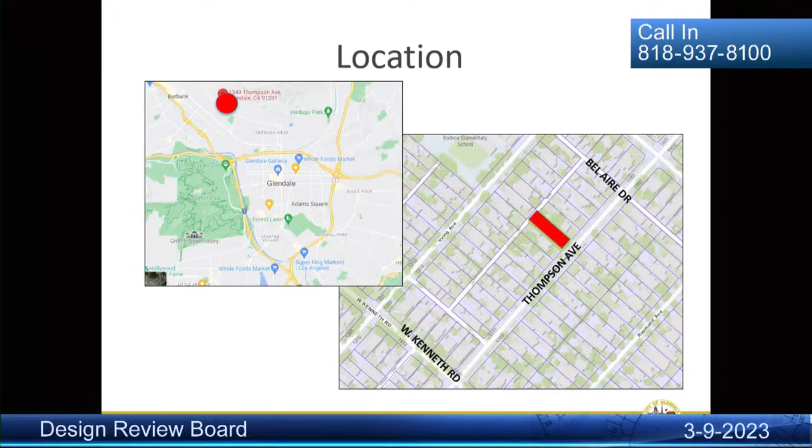The subject site is located in West Glendale on the west side of Thompson Avenue between West Kenneth Road and Bel Aire Drive. The property features a 7,849 square foot, relatively flat interior lot with alley access at the rear. The project will be required to offer a 125 square foot dedication at the alley, which brings the net lot size down to 7,724 square feet for purposes of development standards calculations.

The site is located in the R1-1 zone, which is the low-density residential zone with floor area ratio District 1. The zoning requires a 25-foot front setback, a maximum total floor area of 2,317 square feet for the site, and a 25-foot building height. The existing home is a 1,434 square foot one-story building with a detached garage constructed in 1923 with later modifications. The property does not appear to be eligible for historic designation and is not considered a historic resource under the California Environmental Quality Act.

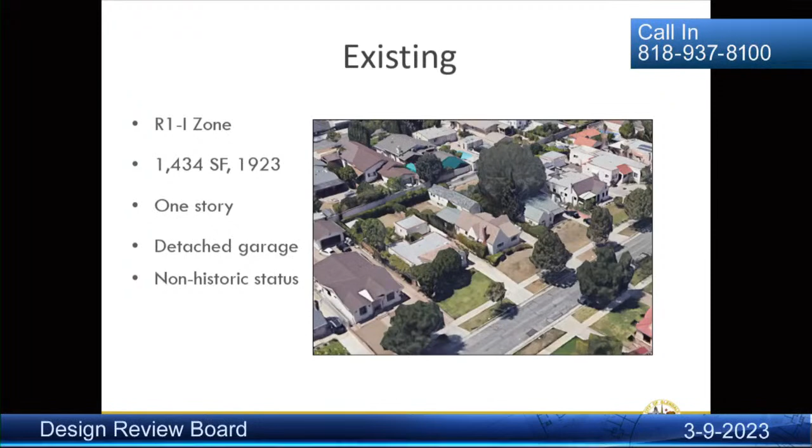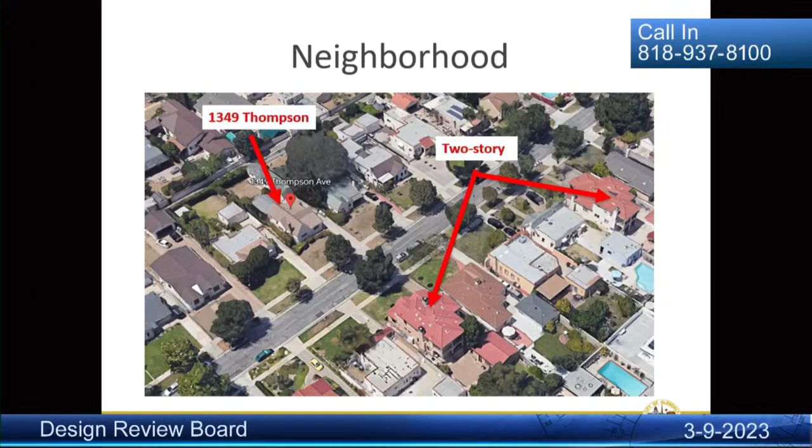The neighborhood consists primarily of smaller one-story houses, although there are two-story houses on the block, one directly across the street, and one 4 houses down in the direction of Bel Aire Drive.

This slide shows the other two-story houses on the street, which both feature second stories significantly stepped back from the front facade.

Worthy of note is that although the zoning requires a 25-foot front setback, the block seems to have actually a 35-foot prevailing front setback.

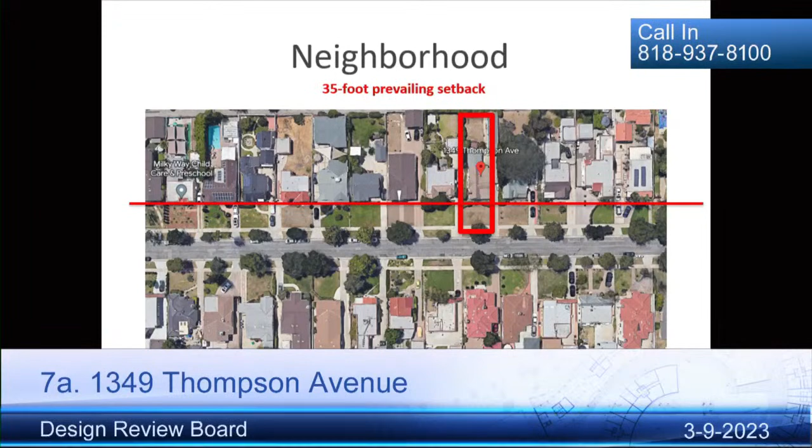The proposal under consideration is to demolish the existing house and replace it with a prairie-style two-story house featuring 2,305 square feet of floor area and a detached garage accessed through the alley. A new single-family home is also exempt from the California Environmental Quality Act review.

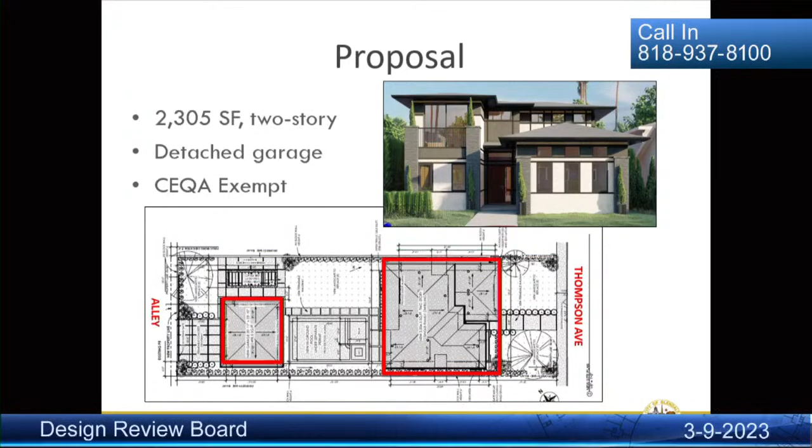In terms of site planning, the proposal includes the primary building at the street front, a pool behind it, a detached garage with access from the alley, and then a detached trellis to the right of that. The proposed building footprint does comply with the minimum setback standards.

However, at the right side of the front of the building, it does extend beyond the prevailing setback. A condition of approval is recommended to address this, perhaps by relocating the front facade or pushing back the house and reorienting the pool to accommodate a revised building footprint.

The current site plan is also changing from being separated from the property to the north, to the right, by a driveway, which was there before, and instead the building is now being extended the full width of the property. Although that's not the pattern on the street, a detached garage at the rear is consistent with the street pattern.

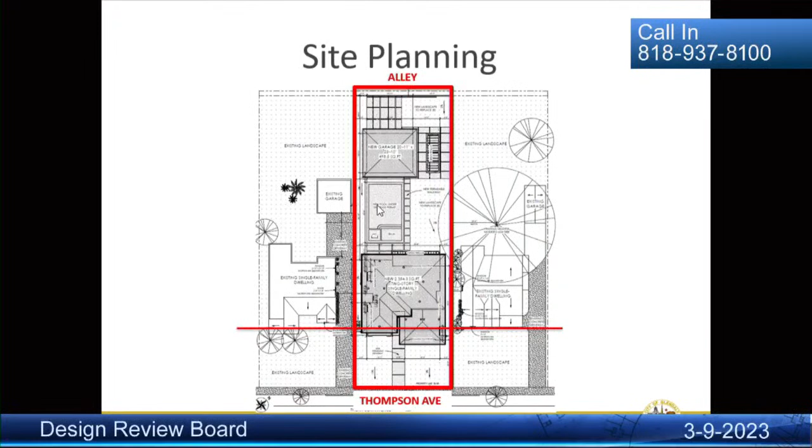The landscaping plan consists of large areas of lawn and shrubs around the perimeter and could use a wider variety of plant type and placement on the site. A condition of approval, therefore, is recommended to address this.

A 6-foot block wall is also proposed around the property, and it is appropriately stepped back from the front facade.

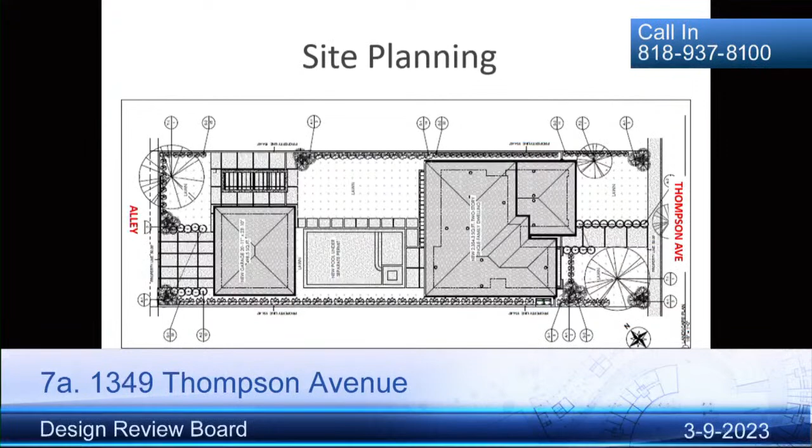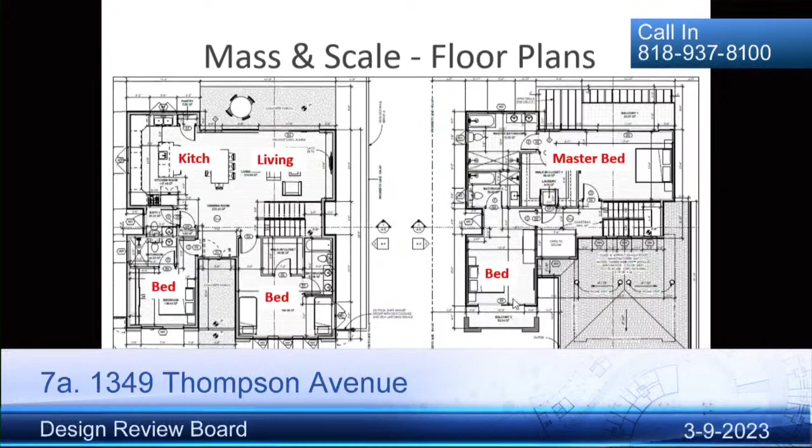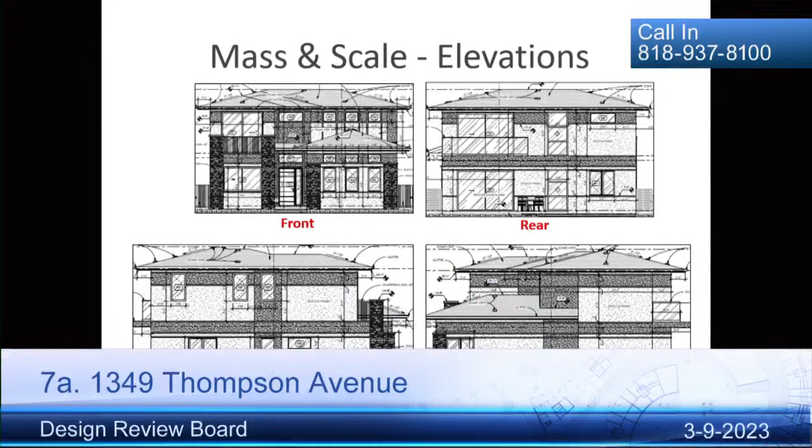Here in the elevations, you can see the lack of stepping on the second story and the resulting boxy massiness of the building. The FAR and height are also being maximized with this project, and while those aren't issues in themselves, the design doesn't temper them, so the building still comes across as tall and massive.

A condition of approval is recommended to push back portions of the second floor at the front and sides of the west side of the building to relieve the sense of mass and enhance compatibility with nearby properties.

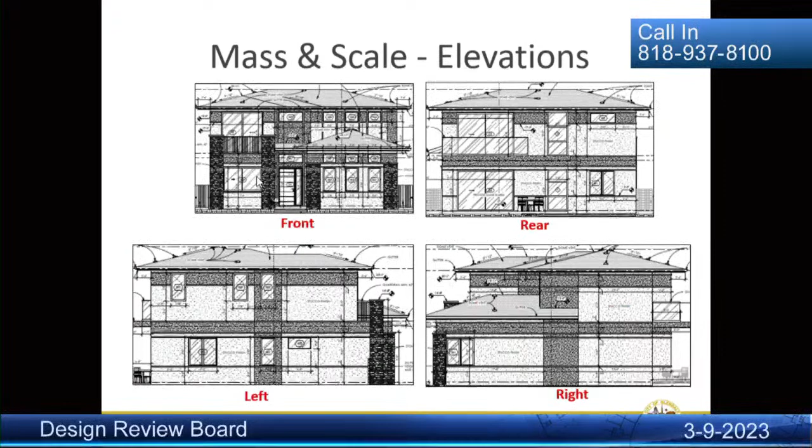Another aspect that adds to the building massing is the tall floor-to-ceiling height, which ranges from 9 feet 4 to 11 feet 3. Reducing floor-to-ceiling heights is another possible approach to reducing the building size and massing.

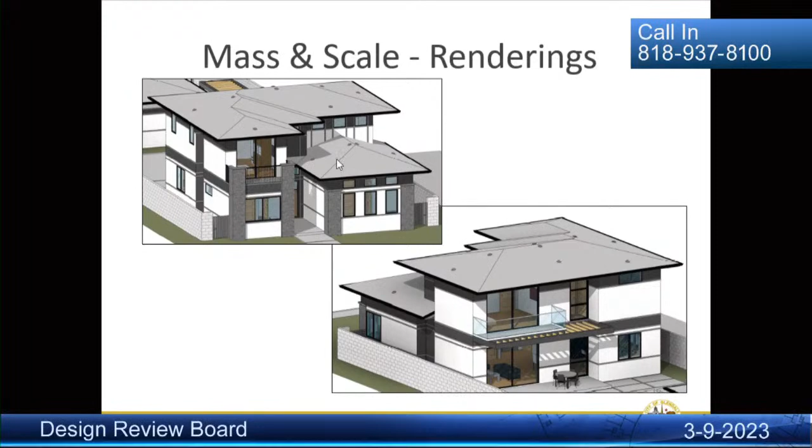These renderings help show how the right front side of the building features stepping, whereas the other parts do not. Over here, you can see the stepping back of the second floor from the first, from this view, whereas this side of the building doesn't feature stepping and this side doesn't feature stepping.

The design and detailing do feature a consistent architectural concept mimicking the prairie style, with an appropriate variation in material and solid void relationships and an appropriate focal point for the entryway. Materials include stucco, stone, aluminum cladding, glass railing, a wood door, aluminum windows, and asphalt shingle roofing.

Overall, the window placement is appropriate. The lack of openings, however, at the east facade leads to some walls appearing monolithic - sorry, that's this side here. A condition of approval is recommended to include additional windows at that facade to help break up the mass.

In addition, the wide slider window at the front left on the front facade on the bottom level is not in keeping with the other windows, which have a layout in 3 parts. A condition of approval is recommended to break that window into a 3-part casement or casements in separate openings to achieve greater consistency with the other windows.

The sliding glass door on the second level also appears too tall, so a condition of approval is recommended to reduce the size to be more proportional to the other openings of the facade.

The material information also calls out foam trim around the windows, so a condition of approval is recommended to require the trim to be precast molding and not field-finished molding.

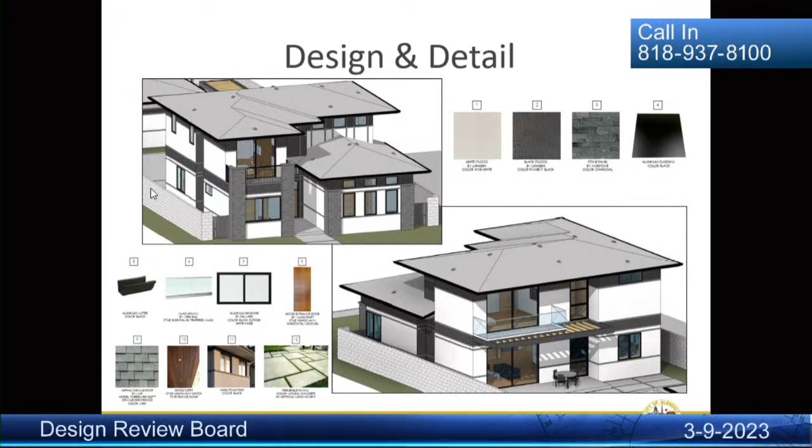And finally, the block wall around the house could be designed to better reflect the character of the house, perhaps by employing stacked bond or applying appropriate cladding.

As a note, one public comment was received in opposition to the project and was shared with the board members prior to the hearing. The letter is from the neighbor adjacent to the project site and expresses concerns about her view being blocked and dust during construction.

If the proposed project is revised to push the building back to align with the front facade or the prevailing setback on the street and reduce the massing, this may help reduce obstruction of views.

In terms of dust during construction, all projects are required to comply with the Air Quality Management District Rule 403, which deals with fugitive dust during construction.

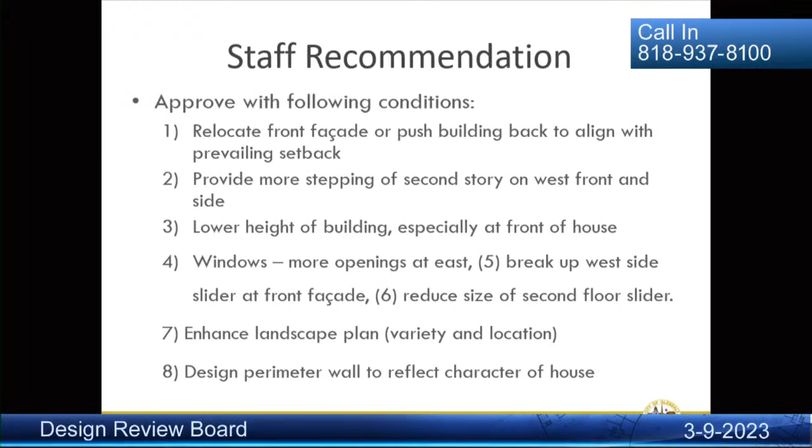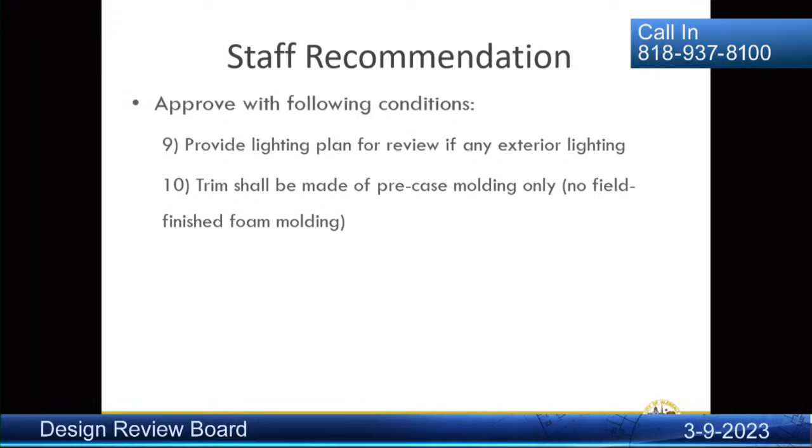Based on the information just presented, the staff recommendation is to approve with conditions. The 8 conditions indicated on this slide were outlined in the staff report, and in addition, 2 other conditions which I just discussed in the presentation were also discussed in the staff report, but they didn't make it into the final list of conditions on the staff report. So that was an oversight. Those are the 10 recommended conditions by staff.

And that concludes my presentation. I'm happy to answer any questions if you have any.

Thank you, Ms. Pruitt. Any questions for anybody? No? I have one simple question.

The existing home, do you happen to know the height? It's a 1-story house, but it's quite tall because of the roof profile, and I was just curious what the existing height is. I do not have that height, I'm sorry. Okay, thank you.

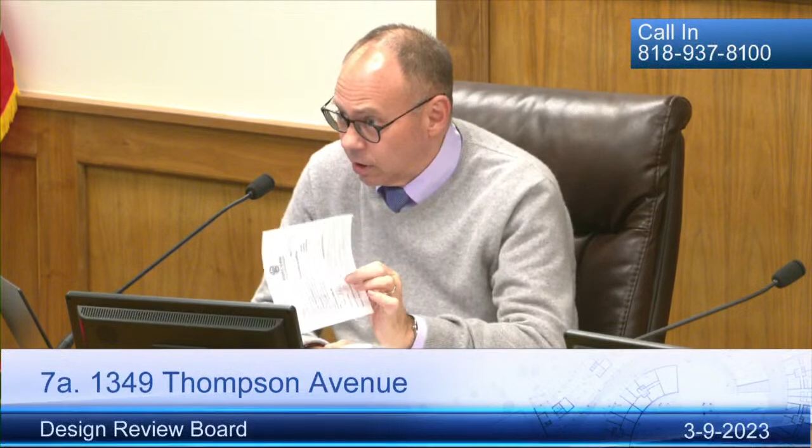My name is Arsen Ajemian. I represent the client. I'm the leader of the team that worked on the design. First, I'd like to thank you for having us here today. That's the only meeting. And I'm here primarily to answer any questions that you might have.

And we have a few comments regarding the staff report and provide maybe possible answers. I know you had a particular order in the staff report, these are in no order. We already reviewed the staff report and went over it with our clients, and we're willing to make some compromises to work with the board and the zoning department. We're willing to reduce the height of those sliders in the front to 8 feet and same in the back for the master bedroom. We also have no problem breaking up the slider window in the front into 2 casements. Regarding the lighting, we will provide a comprehensive lighting plan showing all exterior lighting.

What we briefly discussed, we will go with lantern style lights on the front and the rear, as well as some eave lights. We try to avoid lights on the side of the building to avoid disturbing the neighbors. So primarily front and back, and we will include it in the final plans.

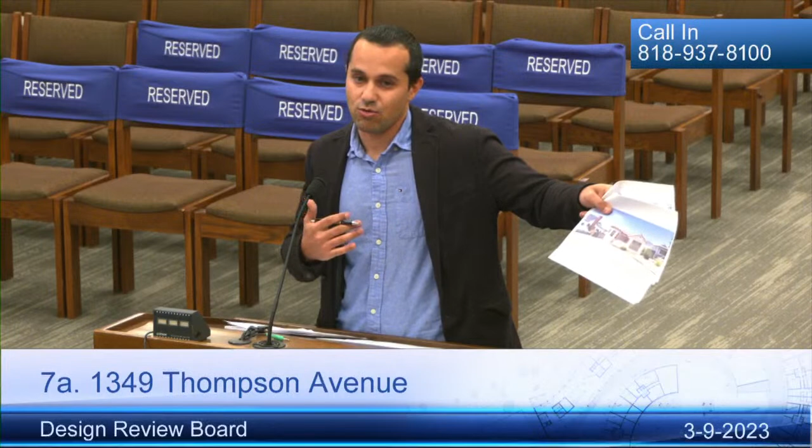Regarding the landscape plan, I believe the staff report calls it overly simplified, but I'd like to point out that we will greatly improve the current landscaping that the existing building has. We also went over some of the other homes on the street, and I have some images if the board members are interested. Based on something like this, I think our proposed landscaping would fall right into the theme and maybe even enhance the neighborhood appearance.

As a summary, we're providing several large trees on the property and over 150 different bushes throughout the lot. And I think most importantly, the massing and scale.

While we are at the higher range of the allowable for area and height, I'd like to say that our building is about 2,300 square feet, but there are other buildings on the street within 300 feet that are over 2,600 square feet, and same goes with floor to area ratio.

We're at 30%. There are buildings that are 32%, I believe. And same goes with the front yard.

As much as we try to offset the building back at the front to minimize the massing, there are buildings that have smaller setback. We're currently showing 25. There are buildings that have 20. I believe it's on the other side of the street, though.

And pushing the building back also becomes more difficult considering we gave up 2.5 feet at the rear, so everything had to shrink. To have a usable backyard with the pool, it's hard to bring the building even further back since it would reduce the usable area of the backyard.

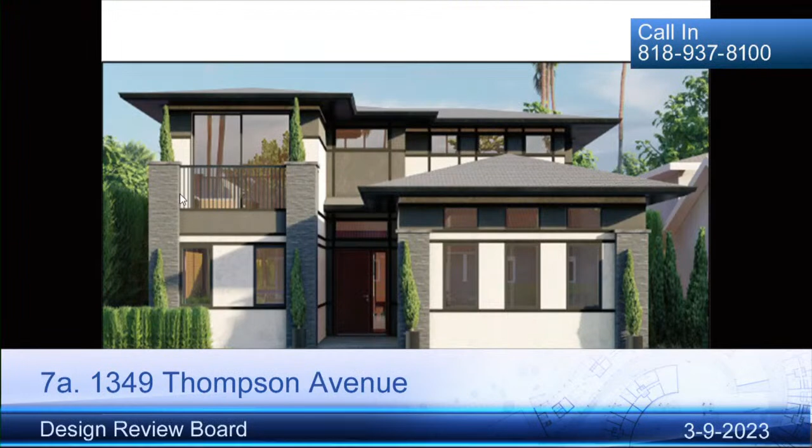Is this what you envisioned? Exactly. You mentioned, and then would the balcony be over the front entry area then? The balcony would be behind the angle of the roof, in that little area where the arrow is going, sort of behind the edge of the roof, the little parapet there.

If I'm picturing that, that would be a pretty extreme cantilever and a lot of soffit under the eave, kind of floating over a balcony. Well, I wasn't suggesting that the front edge of the roof line continue all the way across. It would be stepped back to be in line with that portion.

Okay, so it'd still be a two-part roof. Yes, you'd have the front hip on the front, and then it'd be an angled back at the recess, kind of a reverse of what's going on the second story. Okay, and if we could keep that little sketch - yeah, of course, thank you.

You really are playing the role of Mr. Simonian tonight. I have a couple more, I think.

Okay, so the balcony is going to disappear, and I believe you said to put windows where the sliding glass doors are. Does that mean we would also have a small hipped roof over the lower area? So where the balcony is now, if the first and second floor are stepping back and we're not going to have the balcony at the front, there would now be a roof in that area? Correct.

I would love to see what the designer comes up with, without being too prescriptive about how they do the roof. It could just be one form, but I think the more horizontal the better on that side. Okay, so we'll have a general condition to emphasize horizontality consistently, especially at the front.